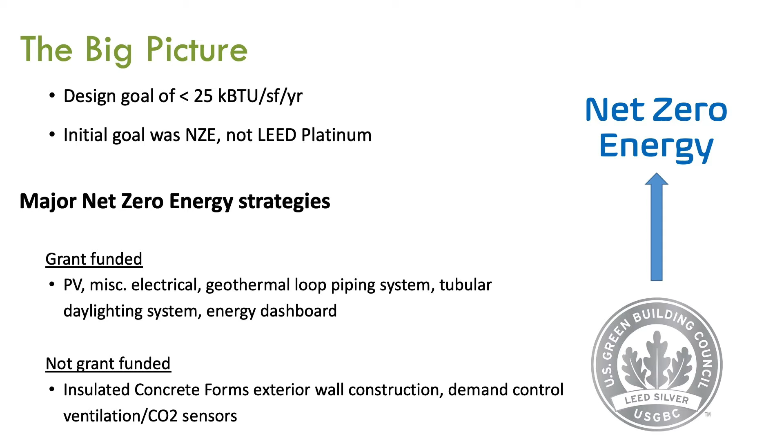Geothermal HVAC system, so ground source water heat pumps. We have solar tubes for daylighting in various spaces, as well as an energy dashboard. There's live tracking of all of the energy use, and that is integrated into the curriculum in the building. One school more than another, but they're run with completely different principles, and they both have integrated curriculum with the dashboard information.

Not grant funded, but as part of the project to get to the energy savings, which is the important part, we also built these using ICF, which was new for us, fairly new in Maryland, definitely new for schools in Maryland. So insulated concrete forms for the exterior walls, all of the exterior walls.

The state came out at one point to tour the buildings during construction. The roof wasn't on, the floors weren't on, but the exterior walls were up. The one building is really close to the highway, and you can definitely hear highway noise on the outside. He walks inside and he's like, you can't hear the highway, even without the roof or anything. So it's a big thing, and I'd do that one again in a heartbeat.

As well as demand controlled ventilation systems and CO2 sensors throughout.

So targeting where we were trying to get to, where we started from was 106 EUI. So 25 is a big difference from 106. Holabird was slightly less at 82, but the code benchmark is 35. So obviously even jumping from 35 to 25 is a big one. And just so you know, we're tracking about 21 right now, so we're even less than that. That's the design where we were when we tracked it, and that's where we are. So huge buy-in, huge difference, big things we had to do to make a difference here.

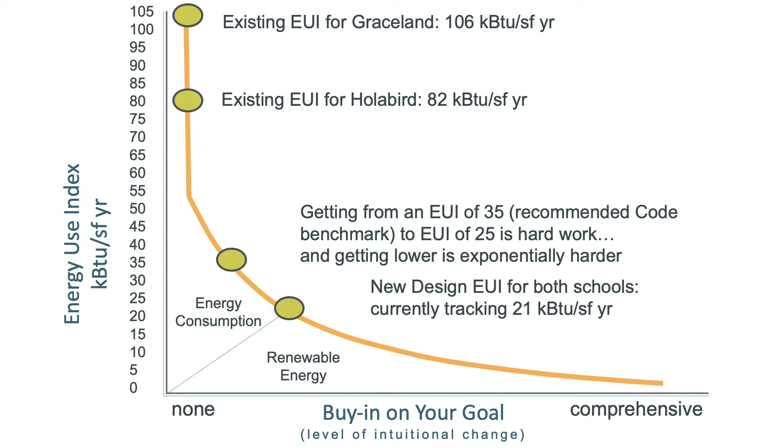So our first thing was, of course, to focus on efficiency for everything. When you start taking chunks out of the HVAC system, which is the easy, no-brainer one, it starts making everything else heavier in the pie, but then you have to take chunks out of that as well.

Plug loads ended up being a big deal for us, to the point where in these buildings, staff are not allowed to bring in microwaves or mini fridges. I think we all probably go to our schools and see that teacher with their little mini fridge stashed in the corner behind their desk. Nope, they get one warning, and there's a staff person in each building who's very much on this, the net zero person. So they get one warning, and the second time around, that staff member cuts the cord. It's not even unplugged, because if you unplug it, as soon as the person leaves the room, they'll plug it right back in. Nope, cuts the cord. So we take it seriously.

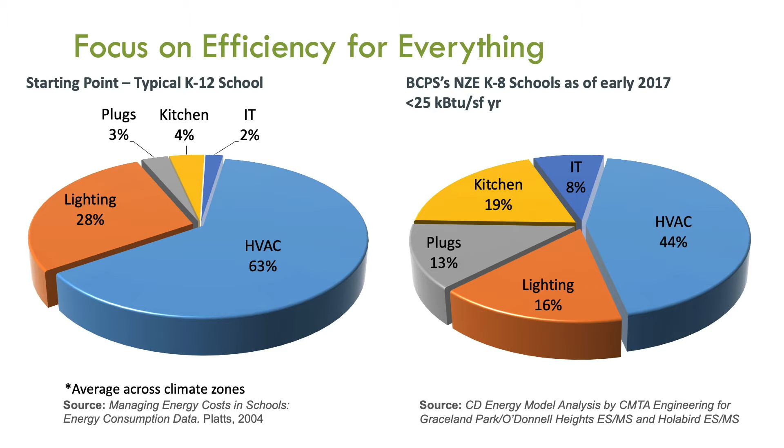This is a goal, so we had to basically cut everything. We had lots and lots of meetings with lots and lots of people. Food nutrition, for example, was a big one, they didn't really want to budge on anything, but we got them to change some things. For example, it used to be our freezers and coolers each had their own door out into the kitchen. Now it's integrated, you walk through the cooler to get to the freezer. So when you open the freezer, you lose some loss but gain it into the cooler, so it's not a complete total energy loss. It's just simple things like that which have now become our standard for the way we do building construction.

The nice thing is these sites are only about half a mile from each other. They don't serve the same communities though, interestingly. As you see, Graceland is really close to I-95. That would be the one the state went out to about the sound issue. But they're very, very close to each other.

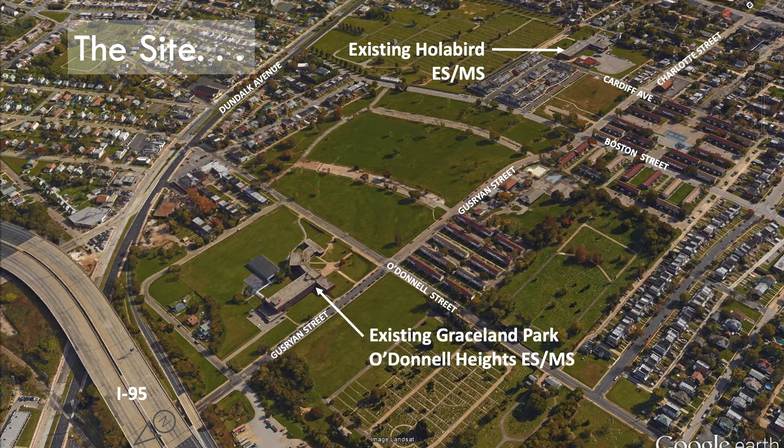The buildings are oriented 180 degrees from each other, so one has one orientation and one the other. The solar panels had to be tweaked a little bit. The geothermal wells, each site is a little different. We had a little less site to deal with at Holabird, but we still had enough site to do the geothermal wells.

When we originally weren't getting the net zero grant for Holabird, we were going to do a case study of the identical schools, comparing how they compare to each other. We're tweaking how that study looks now. It's really more about how, because they operate differently—different community associations in the evenings and weekends, different after-school programs—how does that operation impact usability and energy use in each one?

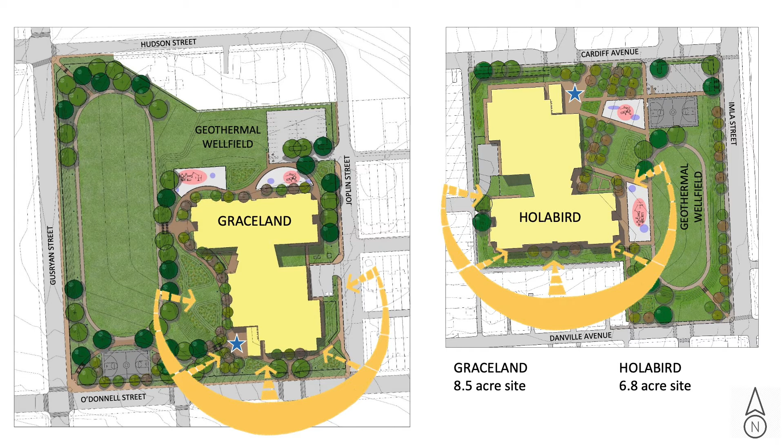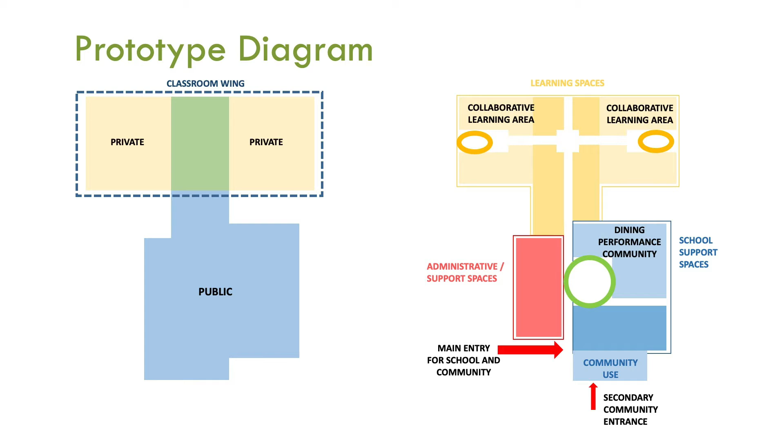Just a little bit about the actual design of the buildings, with the private side versus public side. They are both very heavily used community schools. After-school programs—one runs a GED program, there's an exercise room for the community in the other one. Both have food pantries, both have clothing pantries. So they're very heavily serving the community, and that's one of the big lessons learned we'll get to in a minute.

Occupant behavior—this was, as we went through the design, the biggest part of this: teaching the staff and really the students. The students have been amazing, so excited about this entire thing. They're also one of our biggest proponents as we go through the buildings, making sure the teachers are doing what they're supposed to be doing. But the cutting of cords is a real thing.

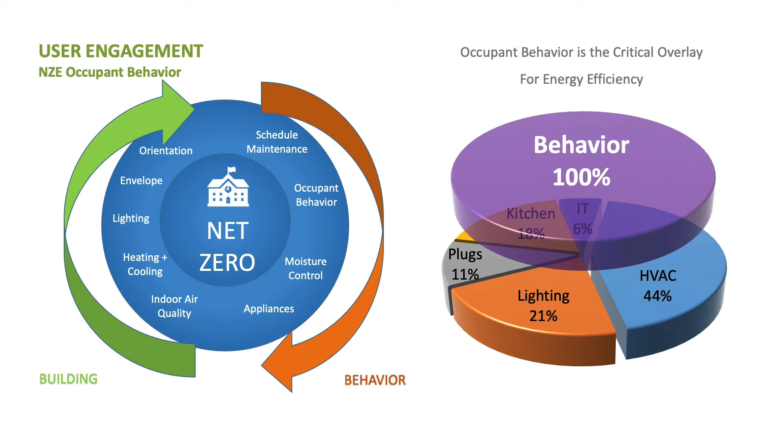Getting everybody to understand—we've only really done that once, for everybody to know we were serious about occupant behavior. But we had a lot of meetings throughout the entire process warning everybody that we were going to do that, because if you don't have the behavior, you're not going to get the results either.

No community members, no staff members—it was so sad. But when teachers were allowed to come back, when we gave the option of teaching from their classrooms rather than offices or from home, every single teacher in both buildings came back. It's the only buildings in the district where that happened. It wasn't just that it was the new school—everybody was confident in the systems we put in these buildings. When we explained the demand control ventilation system, everybody said, okay, we're getting back there.

Then as soon as students came back, even when we went hybrid, parents had the choice to keep them at home versus returning them. We had about 90% of students come back to both buildings—I can't even tell you the exact statistic, but it was significantly higher than district-wide. At this point, Graceland is 100% occupied, literally 100% utilization, and Holabird is at 86%—not 86% of students, but 86% utilization across the building. Both buildings are pretty much full, and everybody wanted to come back, which we have not seen in some of our other district buildings.

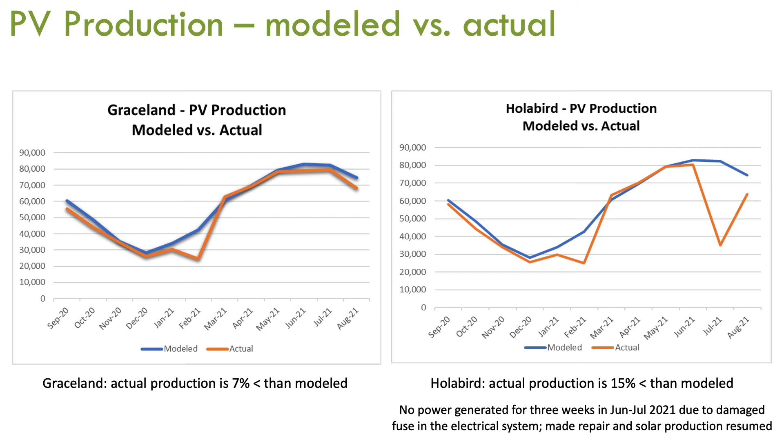Now for the exciting stuff, where we stand: this is our PV production, modeled versus actual. We did have a drop at Holabird—briefly we had a three-week period where we had a damaged fuse in the electrical system, so we weren't tracking and weren't able to actually produce any energy from the solar panels. But we are definitely right on—really, really close. A little bit more in some places, a little bit less in others, but pretty much right on where we modeled for actual energy production using our PV panels.

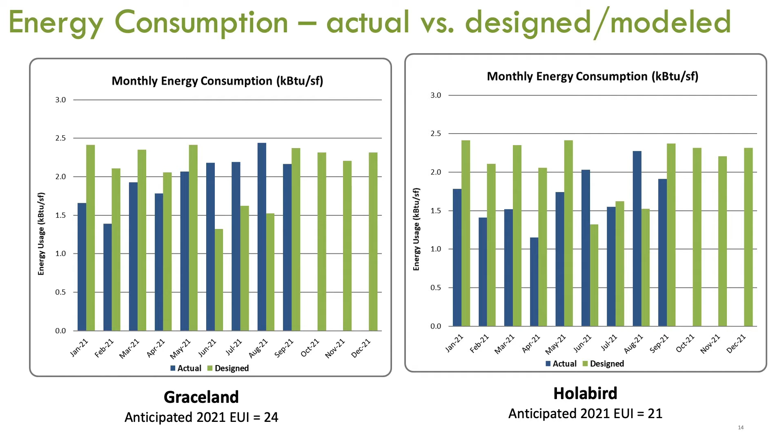Our models for energy use have been accurate all except for in the summer months, and this is where the occupancy models, after-school programming, and summer programming have really become a big lesson learned for us in understanding the kinds of programs schools are going to run in the buildings. So far in the summer, that's where we've seen our model wasn't quite as accurate as we'd have liked because of summer programs run in the buildings. But other than that, our model has actually shown that we've used less energy than we modeled, which is good.

And at this point in time, we have given back to the grid. For both buildings, we have generated more energy than we have used. Now, yes, the first part of that was during COVID, but even as we've gone into full occupancy, it's still tracking that way, in that we are generating more energy than we have used. We've given back as a whole.

And remember, net zero is over a year average. So that doesn't mean that every month or every day or even two months that you give back, it's an average. So you know that during certain months, the coldest or the warmest, mostly the warmest, that's not going to happen. But as we average it out, yes, we are actually now generating more than we have used. And there's Holabird.

So here's what we've learned, and here's what I would do differently next time. First of all, you've got to have a good team, somebody who knows what they're doing. We used a local architect, Grimm and Parker Architects. They hadn't ever designed a net zero school before, or in this case two, but they had an MEP firm they hired as their sub that had CMTA engineers, which is an amazing firm. They're kind of like the net zero gurus. They really kept us on track, did all the meetings with food and nutrition, our IT department, and our maintenance department about everything we needed to do. They helped us make concessions too, of course.

Of course, we have a garden outside with the cistern gardens, one of the outdoor learning spaces being the big thing now. And then, of course, the energy dashboard.

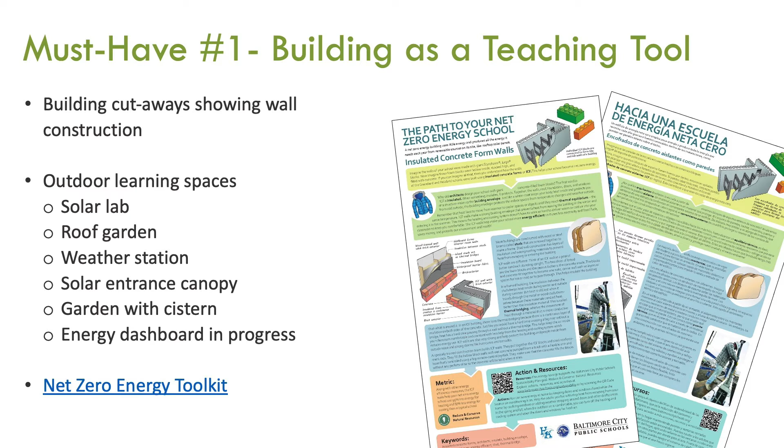What I think is one of the coolest things is that in various places in the building, we actually have cutaways. So in the ICF walls, you can see a cutaway with a plexiglass plate over it, so students can look and see the insulation, the concrete, the rebar, and the more insulation. It's really an awesome thing, as well as vision panels into mechanical rooms and into where mechanical ductwork runs, so you can really learn about how the building runs.

And to go with all of that, there's signage throughout the building at each one of those, whether it's a cutaway, a mechanical room, or the dashboard, that explains what that is, how it works, and how it impacts sustainability in the environment.

Must-have number 2: to get to net zero, you have to have PV. Solar is required. Now, you could get any building to net zero if you had a big enough space to put it in—any building at all. You just have to have a ton of PV. Obviously that doesn't make any sense.

The ultimate goal is energy savings, right? We have 1,300 panels. The cost of the panels versus the efficiency of the panels changed so significantly for us just in the 2 years of construction that the panel price dropped. I don't know about right now, but the panel price when we were in construction dropped significantly while we were building.

So we actually had a hard time even getting to that $2.2 million that they gave us through the grant for PV. We were able to put some more stuff into that grant because of it. But there are also trade-offs in this too.

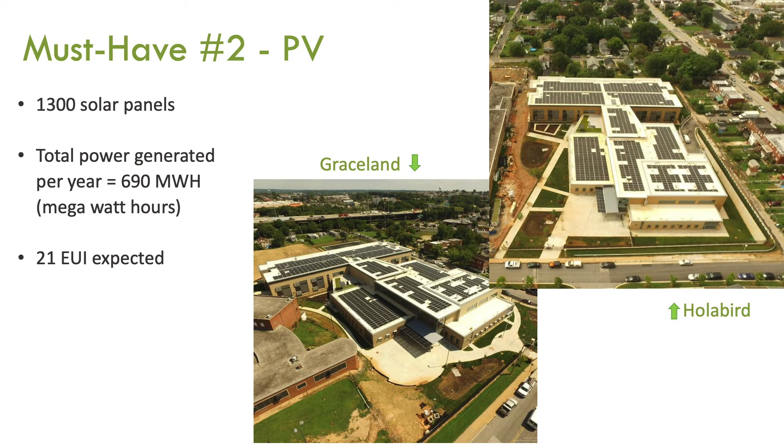When you see the funky shapes like the H shape, that's the gym, where it's kind of an H-shaped solar panel layout. That's because we have solar tubes in the gym, and then the line that runs down and kind of bumps in and out is through the cafeteria. And I'm trying to remember what the other one is—that's a roof hatch there. But the biggest one in the gym is we do have solar tubes in the gym.

Most of the time we can run the gym without even turning lights on. We get so much daylight in through the solar tubes, so that's obviously huge energy savings right there, because normally you have big lights in the gym. So we ate up some roof space for that, but traded it off with the energy savings from not having to use the lights. It was a lot—all these little incremental decisions you make through design make a big difference when you're trying to get to net zero.

The other thing is I would never do this if I didn't have control over the envelope. I was telling somebody this last night. The control of the envelope and being able to have a really tight envelope that the air doesn't leak out is the biggest thing about this. You want to make sure you have the right indoor air quality, and of course, views. We still have windows.

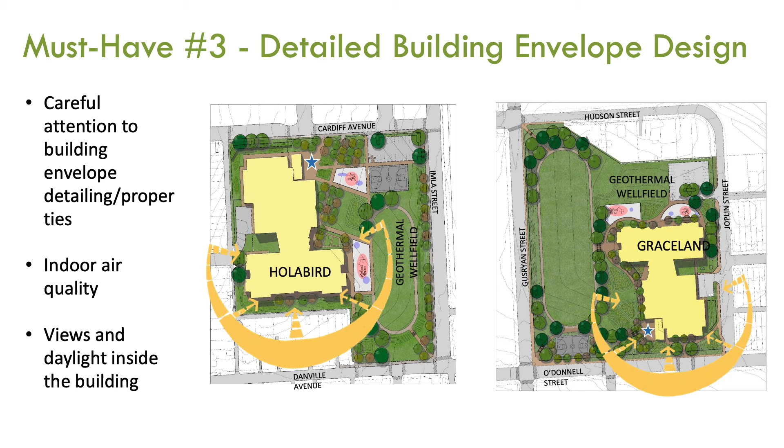There's still lots of windows in the building. But when they did the pressure tests for our buildings, they said the results were one of the highest, or the lowest leakage, that they've ever seen for an envelope. So you've got to make sure you have really good detailing, because that air leakage, you lose so much energy that way. That makes a big, huge difference in the cost.

So training is still ongoing. We have to train maintenance, train the staff for using the curriculum.

Reconciling utility meters was tough. We did purchase our solar outright. We don't do PPAs. We have a really good energy rate as it is, so a PPA just did not make any sense for us. I would do that again also, rather than trying to do a PPA. It just doesn't make any sense for us.

The big picture stuff, our construction costs: we came out to about $358 a square foot, including the site and including the net zero. That doesn't include, so you can take 2.2 million off of that right there. That is less than or equal to what we are typically running, around 365 in the state of Maryland for new construction. So as you can see, even getting to net zero, we did it for the average cost. It did not cost us any more to do this, and it will cost us a heck of a lot less to operate the buildings going forward.

Just a couple of the myths we've found as we've gone through this process: it doesn't have to be difficult to operate. You can do it with simple systems and simple choices. We tried to make as simple of choices as we could, because our maintenance team didn't want anything complicated. We didn't want to make things harder for them. We know maintenance costs are going to cost a lot for running the building, so we didn't want to do that.

So lighting control, simple. Fairly simple HVAC system, making those choices where we had to, and if we had to go to something complicated, making those choices in conjunction with them to make sure we're doing things everybody could work with. As I showed you, we were less than or equal to the average construction cost. Now, who knows what the market's doing right now, but I think the whole thing is going to rise anyway, so it should still hopefully even out.